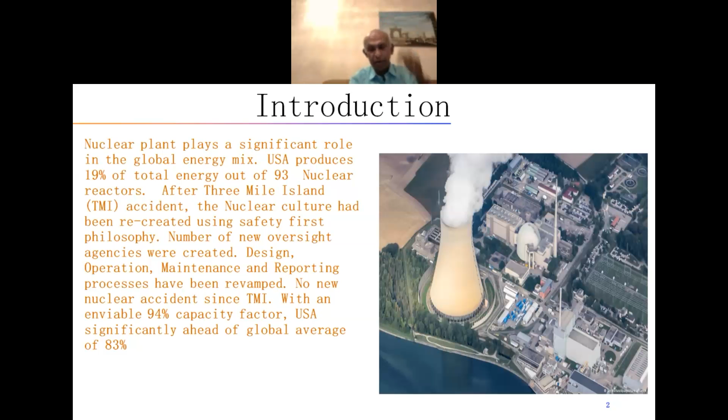Okay, slide 3 is the safety and the non-safety. It's just a breakdown, but every nuclear plant consists of two sets of systems and components: a safety system and components, and the non-safety systems and its components.

There's generally a picture, I think on slide number 6, we'll get to that later. But right now, the safety systems and structures and components, the SSCs, are everything up to and including the second main steam isolation valve. Typically, there are 4 main steam lines coming out of the reactor, and they penetrate the primary containment and secondary containment, then go inside the turbine building, the auxiliary building, and all the other jazz.

Now, they are all non-safety, but safety is up to and including the second isolation valve, of which there are 2 isolation valves on each main steam line. One is inside the secondary containment, the other is just outside the secondary containment. So up to that valve, everything, including primary and secondary containment and their components, is safety related. The rules and regulations for how to design, operate, maintain, and even talk about those things are a lot different than non-safety, and we'll get to that.

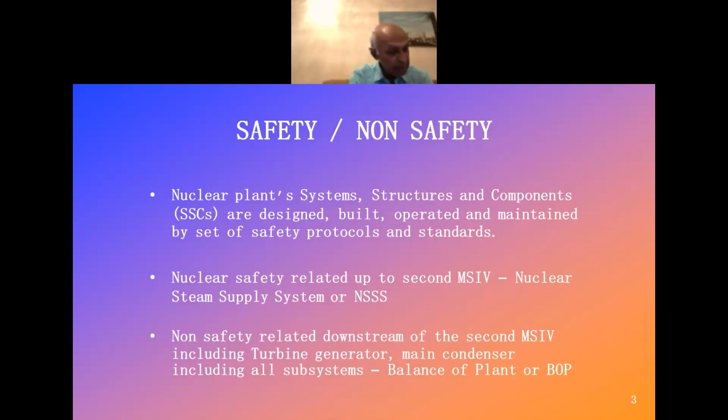So that was slide 3. Can you go to slide 4?

And then the next one is enforcing safety. It is important in the sense that we can write all the rules and regulations in the world, and we can tell the power plants, here is the book, it has all the rules and regulations, go do it. And we know what's going to happen - it is not going to happen.

So there are agencies and organizations whose sole purpose in life is to regulate the nuclear power plants and ensure they are following the rules and regulations that have already been laid out in front of them. We'll talk about this slide a little, but like NRC is the main enforcement agency for the nuclear industry, especially for safety. So we'll talk about that.

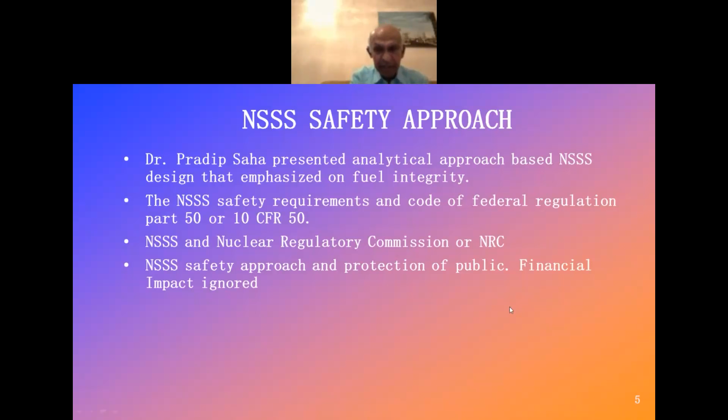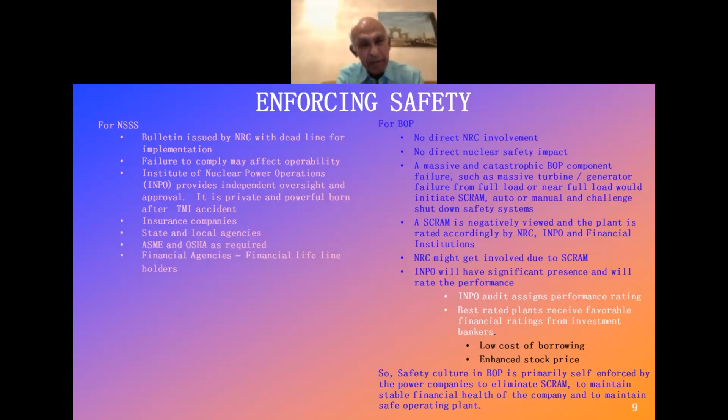And these are the ratings. The best rated plants are in the first quartile, and the best rated plants' financial situation is in very good shape, because their cost of borrowing money and everything is very low compared to other plants with a bad INPO rating. So safety culture in BOP is primarily self-enforced by the power companies to eliminate scram. Scram is probably the most important thing in BOP safety culture. And then the financial things are also part of it.

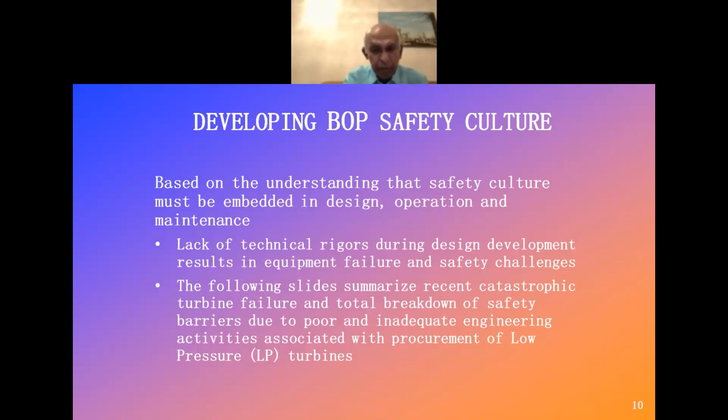Go to the next slide, and then yeah, there you go. Poor safety culture and consequences. So here's the floor where we're showing the turbine at the far end. Then you get the generator next. Then you get the exciter closest to us. So that is the setup, and the main steam line is going out. We can see those two main steam lines from each of the turbines. So that was the clean plant.

And then we're showing the condition of the turbine after it failed. As you can see, there are 4 blades missing. They're just gone. And a host of blades are broken. So this last stage, L0, is a catastrophic failure. The only thing that saved us is when the blades got dislodged from the root, they did not become missiles. So they did not penetrate the outer exhaust hood, but the inner casing was severely damaged.

So that's what happened. So in 2008, this was a catastrophic failure, and a total of 4 L0 blades failed. The inner casing and the condenser neck region of the LP turbine were all but destroyed. If you look at how the inner casing and the condenser neck area were wrecked, you will see the power of 1200 megawatt blades when they are hitting those walls, how much damage they can do. It's amazing.

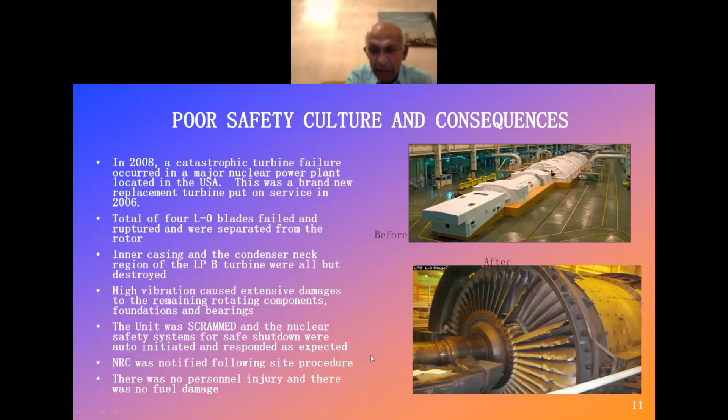So before I go on this one, what happened after that is the management decided that we need to bring the power up. We cannot just sit there, so let's take the blades out and put in pressure plates. That's the picture I'm showing right here. The pressure plates are installed because on the last stage blades, when the steam expands, it has a pressure drop. And what the condenser sees is the reduced pressure coming out of the last stage blades. So you have to recreate that. Otherwise, the condenser is going to be damaged.

So you design this thing with holes, carefully designed by the turbine manufacturer, so that when the steam comes through those holes, it goes through the pressure drop. So the steam at the exhaust will be at exactly the same thermodynamic condition as the exhaust of the last stage blades. But you lose power because the last stage blade produces the maximum amount of power from the LP. So we lost about 200 megawatts, and it took us about 2 years to fix all this. Then we started the plant up, and at the same time we were planning to replace this turbine with a brand new turbine.

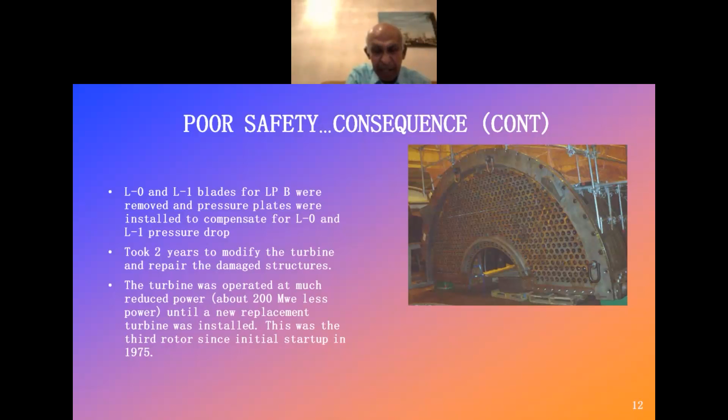So in that incident, the blade just simply gave up. I have some pictures that will show you the beach markings of the blades, which indicate high cycle fatigue. So the reason that this suffered that significant damage and the L0 blades failed, part of the reason was a phenomenon called torsional

vibration. Torsional vibration is basically a phenomenon which is created when, from the generator main lead downstream up to the T&D line, if there is a fault, that fault will create a forcing function whose frequency is 120 hertz. So we are very careful about what we do and how we mitigate the effect of the fault. Fault is going to happen.

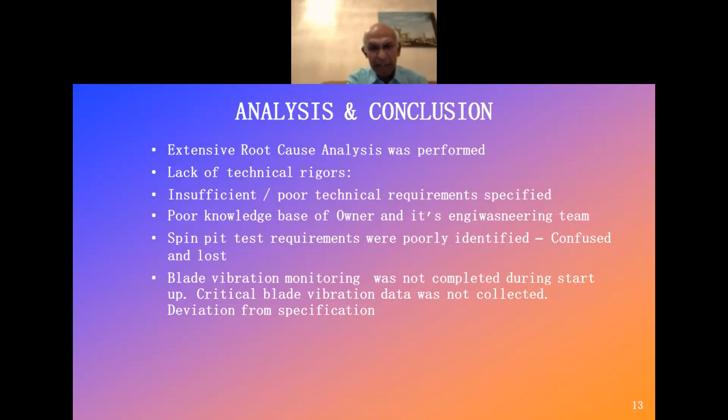Okay. I just talked about the frequency separation of plus minus 6 hertz from 120 hertz required by the specification. In the compliance, however, the manufacturer probably lied. And then they brazed those weights at the tip of the blades, which is completely against the normal rule that you should not braze or weld on the turbine blades, because 12 chrome is not weldable, and everybody knew it.

But the owner accepted that because the owner wanted to start the plant up so badly, because this is their third new turbine from 1975 up to 2006. They have replaced 3 turbines. They don't have a good track record. That's why they said, well, put it in and let's get up. So that's why it was done.

And the other thing is, the torsional thing on nuclear turbines is really massive. These last stage blades, on the subsequent brand new turbine, I wrote the spec on that one. They're 56 inches long. So you do 56 times 2, plus the diameter of the shaft, and you can imagine how huge the last stage area is.

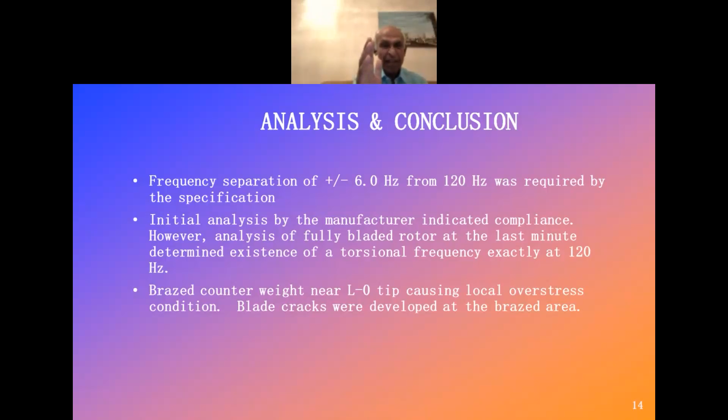Then this manufacturer made these blades freestanding. In other words, a 56-inch blade is standing freely on its own. And there is so much complex hydraulic interaction and vibration that nobody dares except this manufacturer. The only reason they did it is because it gives you the highest megawatts, because you don't lose much power.

But most of the other turbine vendors either take 6 or 7 blades, put a tie wire and weld every one of them, or put a snubber between 2 blades, so that individually they don't shake. But that was one problem that they had. But anyway, that was the owner's call. The owners got what they deserved. So let's go to the 15.

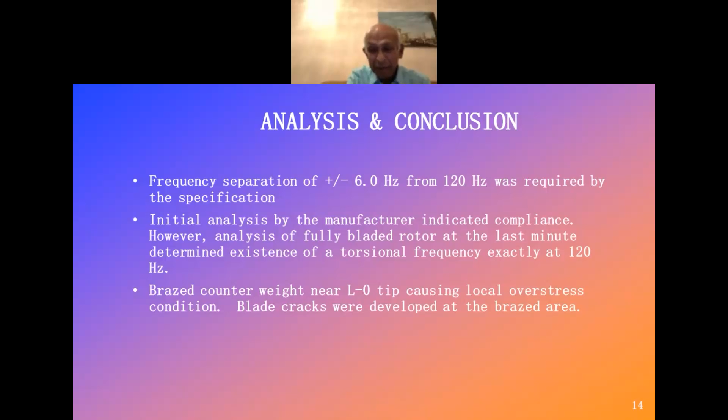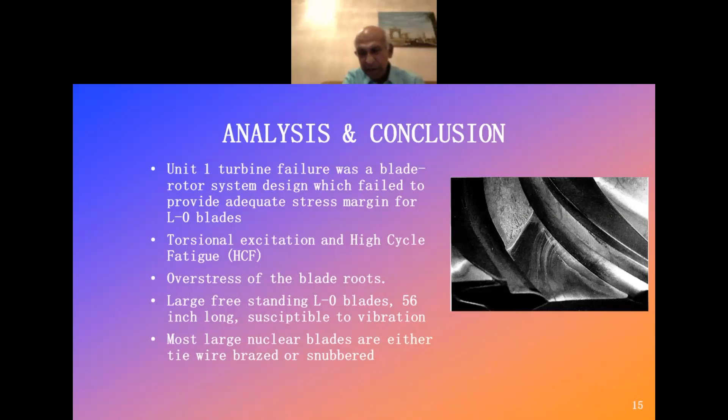So this is the high cycle fatigue phenomena, and that's what happened. We believe that's the primary reason that it failed. And I said that the freestanding blades are in most lots either tie wire brazed or snubbered. Okay, next slide 16.

Summary and takeaways. As I mentioned, this presentation is in large part based on my personal experience since the TMI accident. Over the last 50 years, almost all NSSS or BOP accidents have a common cause of failure: insufficient knowledge and lack of willingness to apply rigor.

The relaxed approach resulted in compromise in operation, design, maintenance, and other critical functionalities and created an unsafe environment. This shift remains largely unknown to the user until a significant failure occurs. The owner does not know that their folks are far away from following the safety culture until a catastrophic failure happens, like happened where I worked.

Therefore, safety is a culture that must be internalized and embedded in the daily activities. And from my view, there has been significant change in the owner's approach to the daily activities and accountability. So now they are in pretty decent shape in operation.

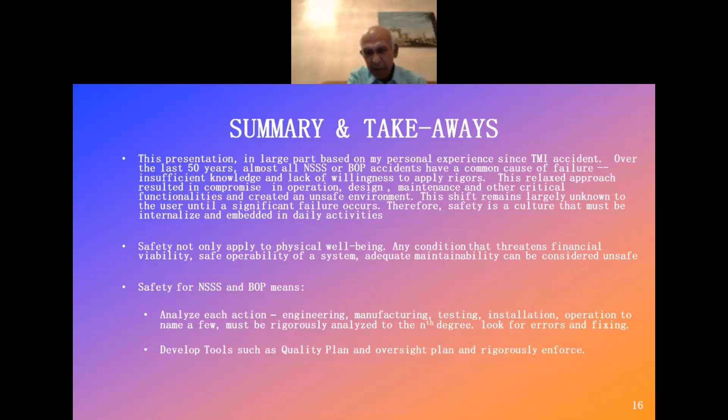So basically, safety for NSSS and BOP means each action, engineering, manufacturing, testing, installation, operation, to name a few, must be rigorously analyzed to the nth degree to look for errors and fix them. Tools: process, quality plan and oversight plan, and rigorously enforce. I think that's probably it. So let's go to the next slide, 17.

Thank you. So that ends my presentation. I think it's 8:25. Sorry. So I can take a few questions. I don't know if I can give all the answers.

Thank you, Shubhendu. Floor is open. We really appreciate your presentation. It was very interesting. And since I'm a moderator, I'm not going to talk anything about it. But I will request first, with permission of the floor, Dr. Pradeep Shah to talk about it. After that, I will ask Uchudda to make his comment. After that, I will open the floor. Because I think there are a lot of questions and concerns, I'm trying to sort of channel. Okay, start with Pradeep and then Uchudda.

Kamala, may I just request something since I have to jump in another call in 2 minutes? Okay, I will allow you to break the line. Go ahead. Well, first of all, thank you very much, Shubhendu. My name is Biman. I'm '81 Metallurgy.

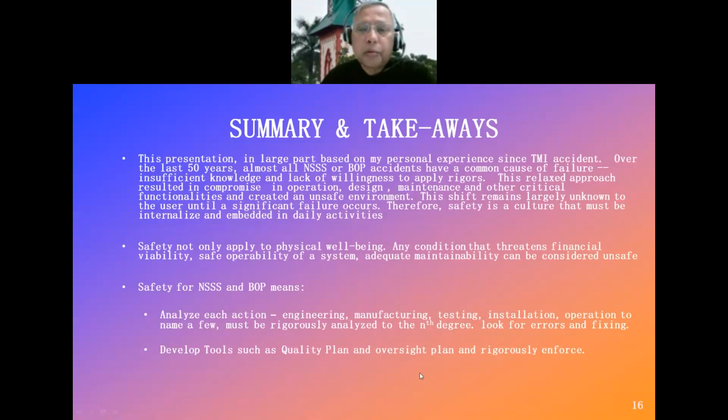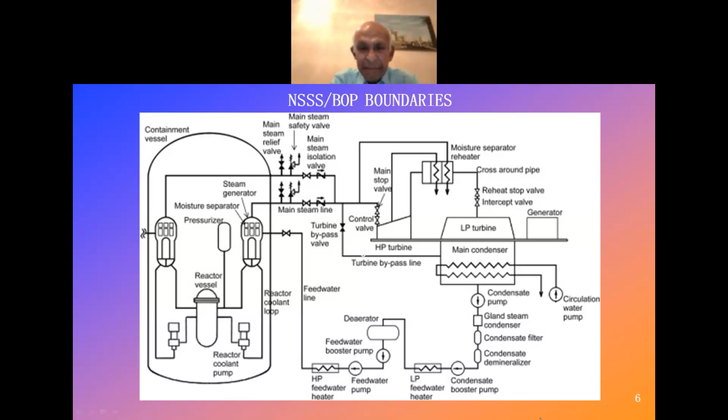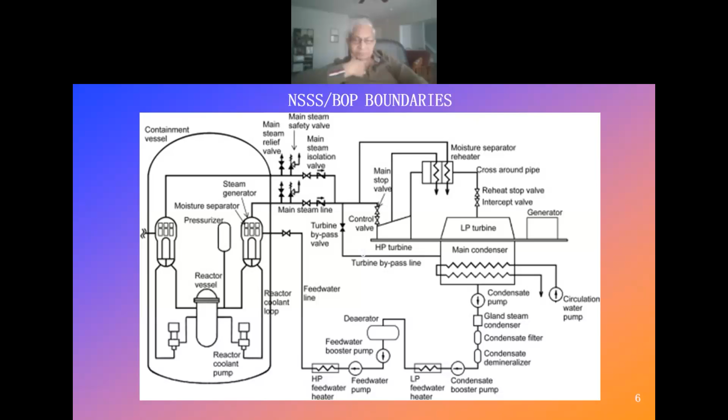What's the question? Slide number 6. I'll show the slide, then I'll ask the question. Slide number 6, Bidut. 6. That's it. Yes. Okay. What happened? This is a slide. Okay. Maybe not this slide. Next slide, please. Next. Okay. Yes, that's the one.

The NSSS part, which is the prime aspect of nuclear safety, the owner has already taken care of. They know there are no issues on the NSSS part. But if the commercial part becomes the last item, a lot of plants are simply going to fold, because they bring the commercial, profitable culture in front of the people. And to be honest with you, the bonuses and this and that are all tied to the commercial outcome. But at the end of the day, they said you could achieve that without sacrificing safety. So in design, operation, maintenance, the technical rigor has to be there so that you achieve the favorable outcome without sacrificing safety.

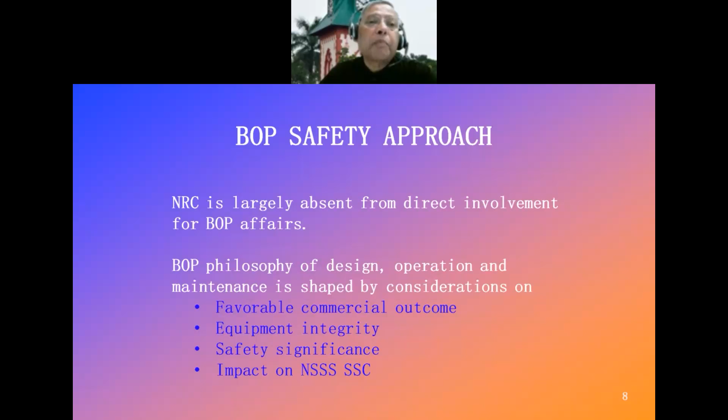All I'm trying to say is, what is the role of the safety process when an external review comes? Is there anything we can think of to appease people like Chudha and myself, where every company might be obligated by government mandate, including maybe NRC, to have an internal review process continually, rather than wait for the external review to come and find fault with you. There should be some daily log of how the operation is going, and that must be publicly available. Chudha's question and concern is going to be relevant for the next 100 years, so it's not something we can just talk over and resolve. But in your case, the question you have, that's easy.

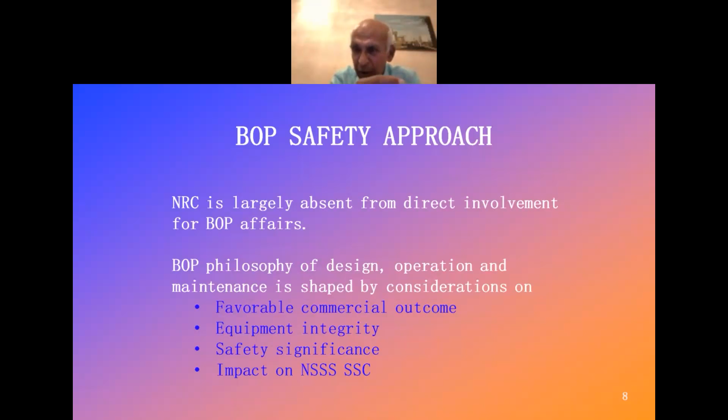When I say self-enforced, I mean that all the applicable procedures and processes are created by the owner, and they set up the acceptance criteria, but it's not arbitrary. The acceptance criteria or pass-fail criteria, whatever they have to use, is not arbitrary. This is either extracted from industry info, OE operating experience, or they get it from analysis. But that's how it's done. It's not something where NRC is telling you to go and do it, saying these are the numbers you better meet or else. It's not like that.

But if you look at the role of INPO on the BOP, INPO is an external agency. They have tremendous power to make or break an owner's financial health. INPO comes and audits every 6 months or so, asks everybody questions, and then publishes the INPO rating, which goes to the investment houses. INPO is made up of engineers and operators. They don't care what the owner is thinking, they just look at whether the plant is good or bad.

So even though it's self-imposed, it doesn't mean the owner can do anything, because the owner knows that if they have a shortage of money, they may want to cut corners. Then INPO comes in and finds that they've cut corners in an area they shouldn't have. They'll rate the plant, say, a 3 — that's a really bad rating. Their investment rating goes down even further, and they end up in an even deeper financial hole. The owner knows that even with financial problems, they have to maintain a top-notch plant, because they need to get the INPO rating up and their investment grade up. If you run a good plant, your operating cash flow goes up. So it all comes down to this: if you do the right thing, everything else falls into place. If you do the wrong thing and start screwing things up, you're going to have problems. That's what really happens.

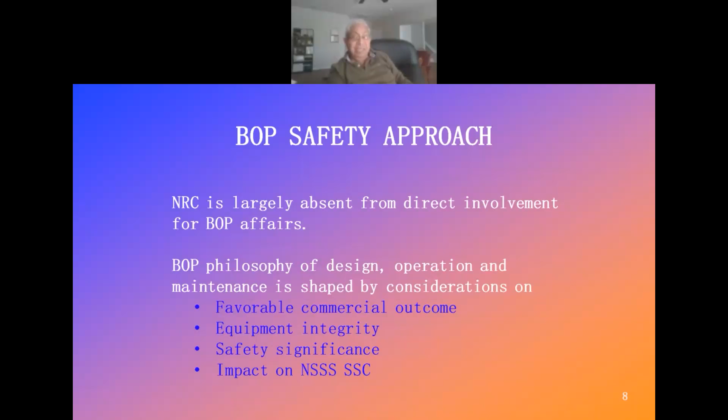See, the one big difference between USA and many other countries like India, China, Russia, and to some extent France, is that nuclear power plants in America are still private utility property. They are the ones running it, they are the ones either making profit or taking a loss. NRC is there, INPO is there, but they are not directly involved in the operation or financial health of the company. Whereas in other countries where the nuclear industry is more or less government owned and run, they don't care as much about profit and loss. So that is a big difference.

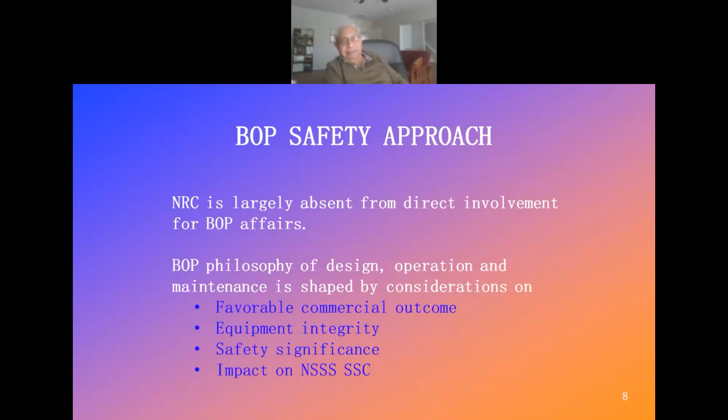So here in America, things are in checks and balances. From whatever I know of almost 50 years in the nuclear industry here, yes, utilities may try to cut corners, but particularly after the Three Mile Island accident, as Shubhendu said, there has not been any accident — maybe there are incidents, and NRC used to have incident reports too, and those are open to the public so other utilities can also learn. So there has been, I believe, pretty good checks and balance in the nuclear industry in the USA.

So nothing to worry about, and I will not get into Chuda's argument. So to assure Kamal — I do not know whether those 4 bullets that Shubhendu put up are really on a priority basis, or if these are just 4 things that he listed. I do not know.

Shubhendu can say that financial health is priority number one. It is of course a priority to run a plant, run a company. But I'm sure they look into all aspects of safety of BOP as well, because BOP can trigger something bad in the NSSS, and no owner wants that.

This final question is for both Pradeep and Shubhendu, since we're running late. This is the data you gave us: capacity factor in USA is 94%, and global average capacity is about 83%. What is the technical reason for such a differentiation? It's a significant difference, almost 15%. Is it because of technical knowledge, or is it because of checks and balances rather than compulsion by a government agency? What is the real reason for this significant difference in power output?